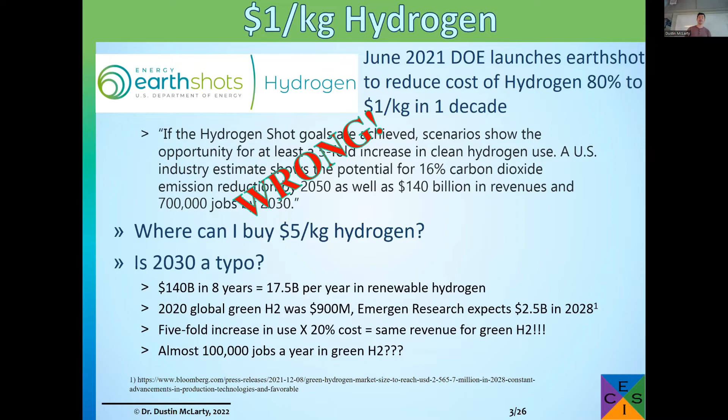I was really confused by this idea that we're going to see a 5-fold increase in hydrogen use while reducing the cost by a factor of 5. Wouldn't that mean we have the exact same revenue we have today? And I'm not sure if we're actually going to be able to hire 100,000 folks in this field every year, because I don't know where we're going to train 100,000 people in hydrogen every year.

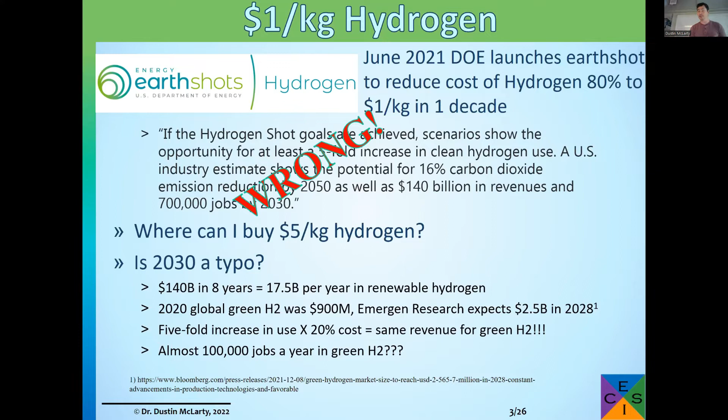But that is one of the goals of our center, to do that workforce development, especially here in the Northwest, where we are definitely leaders in this area. So some of the specifics of their statement were a bit of a stretch, but the overarching goal of $1 per kilogram green hydrogen, there's a lot to that. So let's see if that's even reasonable or feasible.

Well, for clean energy, everyone normally looks at California for leadership. If we start with a typical PEM electrolyzer you can buy off the market today, the most efficient ones advertise a nameplate efficiency of 55 kilowatt hours of electricity per kilogram of hydrogen produced. If we look at California's average retail electricity price, just the feedstock energy input is over $7 a kilogram. Okay, well, California is going to be a stretch to reach this goal.

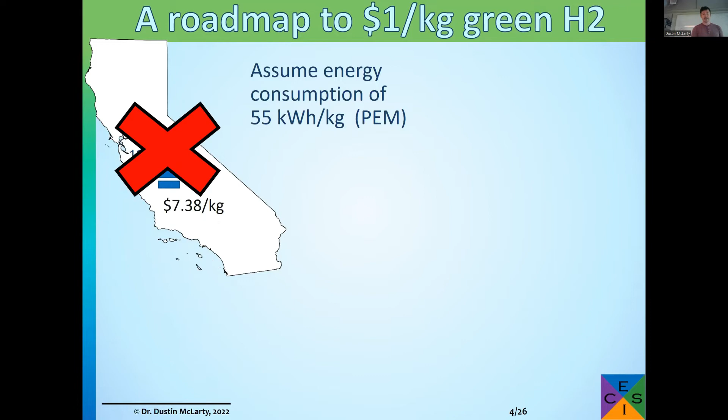Let's look at business-friendly Texas, where because of their deregulated energy market, you can subscribe to a 100% solar electric rate, with a 5-year locked-in fixed price, at 12.5 cents per kilowatt hour delivered to your house. Well, that's still almost $7 of energy cost per kilogram of hydrogen. So that's going to be a tough sell.

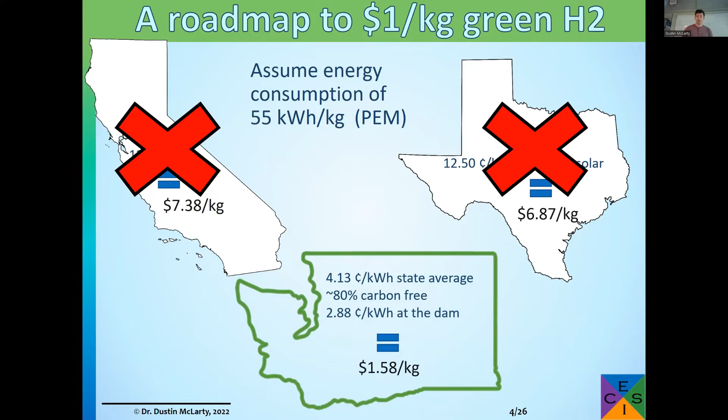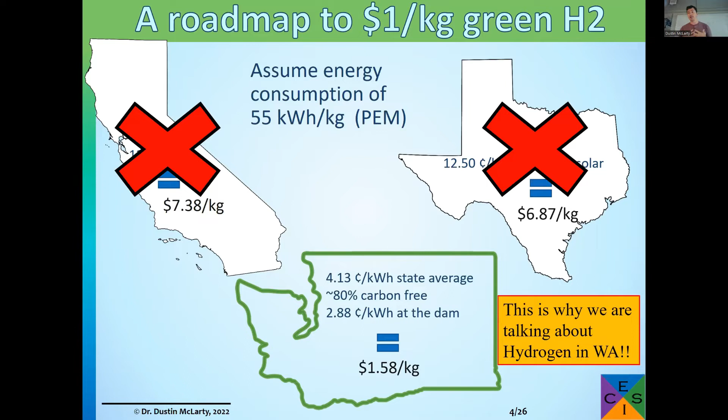Well, let's look at where we are here in the Northwest, where we have the cleanest, greenest energy in the nation, and it's cheap too. Our state energy mix is 80% carbon-free and costs on average 4 cents for industrial consumers. If you put your Bitcoin mining rig right at the dam today, you'll pay around just under 3 cents, which works out to a remarkable $1.58 per kilogram of input. So we're getting closer, and we have a huge advantage over Texas and California. This is why Washington is really talking about being a leader in this area of electrofuels and hydrogen.

But it's still not $1. So we have to do something more to get to $1. Let's look at the cheapest energy in the world, and we've got to cut out the middleman. We have to cut out the grid, because the grid's going to charge you 2 or 3 cents just to get it from the farm to your facility.

So looking just at solar farms, the average of the 25 largest solar farm PPAs built last year was $27 a megawatt hour. That's pretty good. The cheapest ever built, claimed, is a very large solar park in Abu Dhabi that came in at $13 a megawatt hour. They didn't have to pay or lease the land at all, so that's really just the facility and infrastructure cost. And they have great solar potential there.

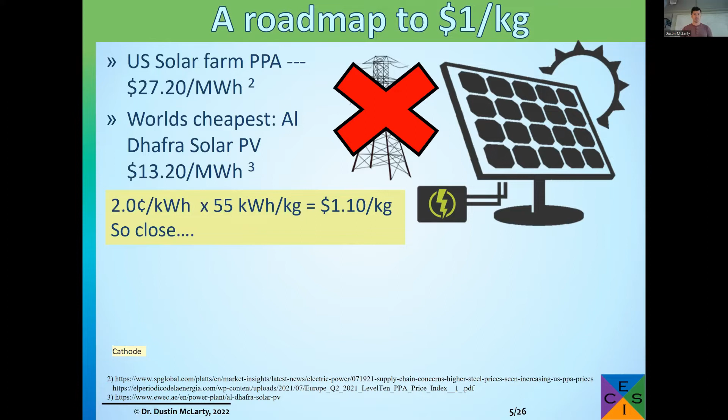So it's going to be hard to get to $13 here in the Northwest, but let's imagine we can get to 20, which works out to 2 cents a kilowatt hour. Using existing PEM electrolyzer technology, you're just over $1 on your feedstock cost. Pretty close. But if we want to go a little farther, we could talk about solid oxide electrolyzers. These have the potential to be down around 40 kilowatt hours per kilogram, a much more efficient use of electricity. So now we're at 80 cents of input cost, your variable cost, and that leaves a bit of margin for your upfront capital costs.

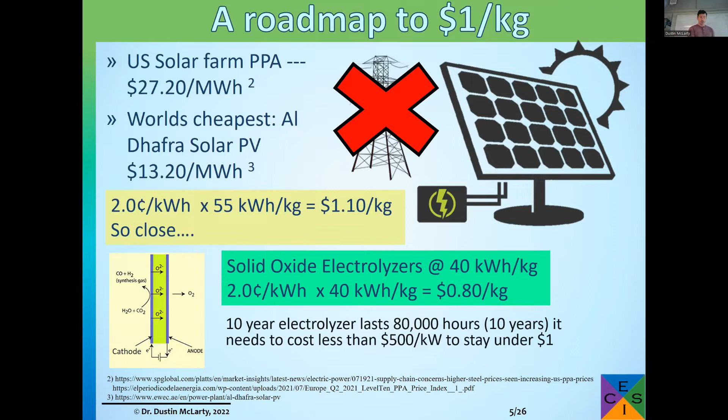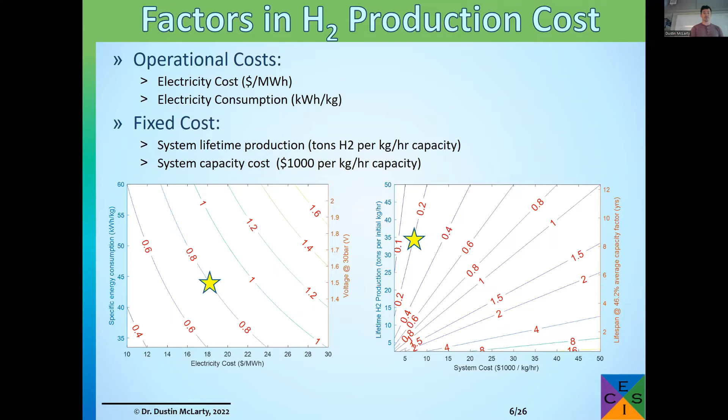So imagine we are successful in producing $1 per kilogram hydrogen. What are we going to do with it? Well, a lot of talk, especially in our region, is about injecting it into the pipeline, decarbonizing that natural gas system. Realistically, upper limits are about 20%. They're targeting maybe a 10% regulatory maximum initially, but let's average that and say we could get up to about 15% of the volume in our natural gas system as hydrogen. Unfortunately, that only works out to about 7% of the energy content, since hydrogen is a rather non-dense gas.

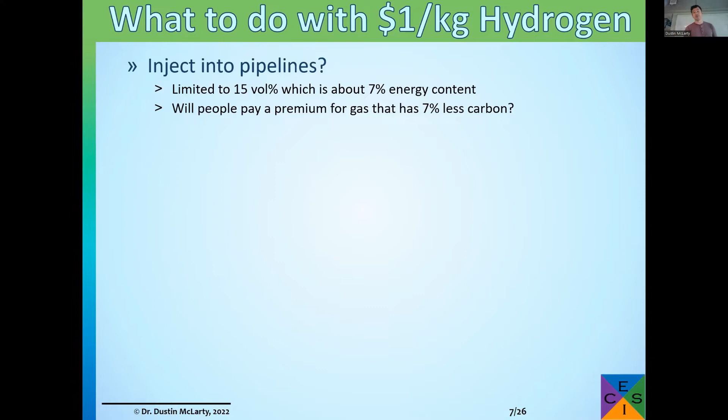Will people actually pay a premium for a fuel that's 7% less carbon? Not particularly, so you're only going to be paid pennies for this fuel content. It's not a really valuable use of hydrogen, and while displacing 7% of our natural gas would be a huge carbon reduction net, it's not likely the first place hydrogen is going.

What's done today, mostly moving it around California, is we liquefy it. It costs somewhere between $5 and $8 extra for the cryogenic capital equipment, the trucks, and the distribution system. So for every kilogram we're adding $5 to $8 cost, which is why it's $15 per kilogram at the pump in California - $7 of fuel cost, $8 to get it to the pump. So that's going to be difficult.

We could compress it and truck it - it's a lot more efficient to compress, and the trucks are a little cheaper, but we can only carry about 900 kilograms on the most advanced tube trailers. So even if we achieve $1 per kilogram, you're using an entire semi-truck to move $900 of goods. I put $900 of goods in my trunk every time I go to the supermarket these days. It's just not a viable means of getting hydrogen moved around.

We could build a dedicated pipeline network, and that's part of most proposals for this hydrogen hub, the Northwest Hydrogen Hub - a dedicated hydrogen distribution system that works for big industrial consumers and specific applications. But it's not going to address transportation everywhere or residential energy consumption in any way.

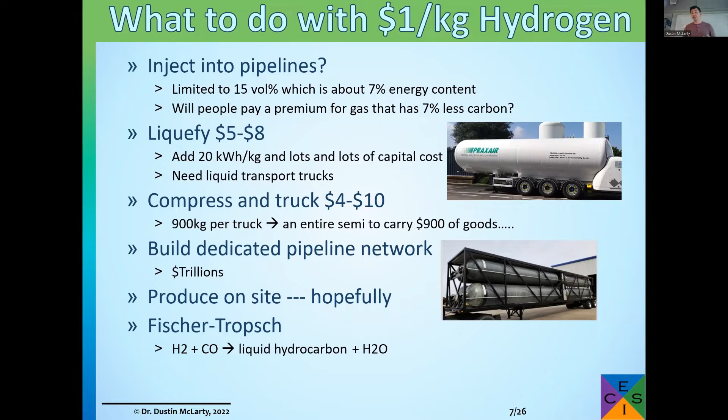So this is something I want to dive into further. If you're going to take hydrogen and make it into a liquid fuel or natural gas, we need to attach some carbon - we want to make it carbon neutral, so you've got to get green carbon somewhere. There are definitely places where carbon capture is happening at fossil fuel plants, but we need a universal solution, and we want to shut down all those plants anyway.

So we need a solution like direct air capture. The largest examples today are approaching $100 per ton of CO2 captured. The DOE has set another one of their Earthshots targeting $60 per ton, which works out to 53 cents per gallon of gasoline equivalent.

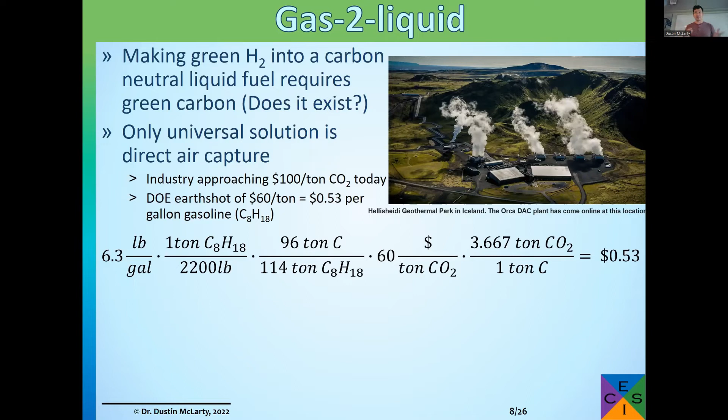So if you're starting from $1 per kilogram, and a kilogram of hydrogen is roughly the energy content of a gallon of gasoline, and we're adding 53 cents of carbon to it - would you rather be in the business of selling $1 per kilogram green hydrogen, or $1.50 per gallon green gasoline, or even $2 or $2.50 green gasoline? You'd make a lot more money that way and have a much bigger impact in reducing carbon.

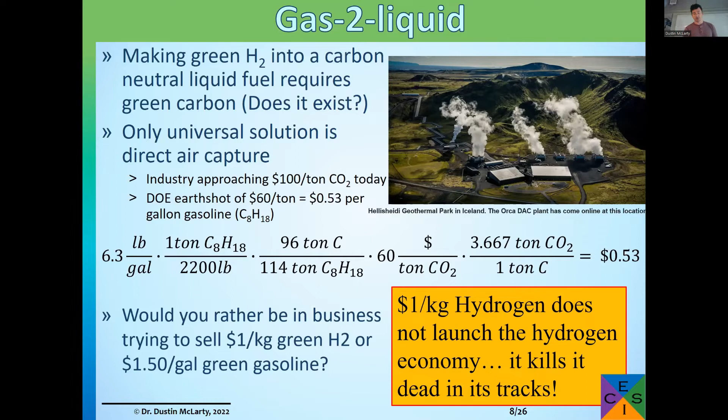So I'm fully supportive of DOE's target to get to $1 per kilogram hydrogen, but I don't believe achieving that will launch a hydrogen revolution in terms of transitioning everything to hydrogen. I think it'll actually open the door to electrofuels in general - non-fossil fuels that are direct, carbon-neutral replacements for our fossil fuels. That's where I want to focus my efforts, and where we're trying to propose a center that would focus on this as well.

So with that background on where I think electrolysis is going, I want to focus on pressurized electrolysis and talk about some of the benefits and challenges with that.

The clear benefits are, if you can do your electrolysis at pressure, you can pressurize the liquid water and then produce your gas, rather than producing gas at atmospheric pressure and having to use a hydrogen or gaseous compressor that's expensive, unreliable, and inefficient. When you go to quite high pressure, you can actually get better thermal energy recovery just because of the thermodynamic properties of the fluids we're dealing with, and I'll show that in a moment. You can also get better integration with the thermal chemistry.

So if you want to do methanation or ammonia synthesis, these things need to be done at high pressure. So if you can produce your hydrogen at pressure and go right into the reactor that's doing this thermal chemistry, you can combine the thermal, make your electrolysis endothermic, and if you have an exothermic reaction, it can be paired with that.

Pressurized electrolysis is great for direct integration with different storage opportunities, right into pipelines or your end use. Imagine a filling station that looks just like an electric supercharger, where the hydrogen is made on demand at the pressure as it goes into the tank. That's going to be more effective than trucking hydrogen around and having liquid hydrogen storage that needs to be boiled off and recompressed in a very complicated fueling station.

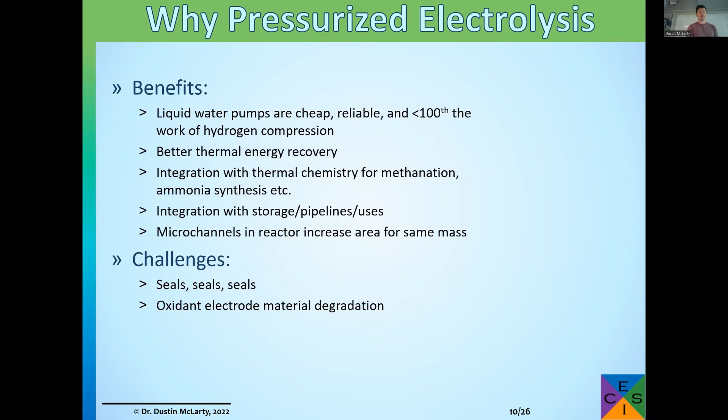Now, low temperature electrolyzers, PEM alkaline, they've demonstrated pressurized operation. They're pretty reliable. You can buy systems today operating at 30 bar, 200 bar. And so I'm going to compare a little bit to that as the baseline of how we could achieve 30 atmospheres of pressurization with high temperature electrolysis.

Now I'm going to present some results of an analysis that a student worked on, focused on this generic system. I'll detail it a little bit here. The premise is you have one liquid water pump that's doing all of the pressurization. It goes into this heat recovery system where it's recovering as much exhaust heat as possible. And you have two potential places for supplemental heat addition, which could be electric heating or heat recovery from another process.

And then I really want to start by highlighting this idea of an ejector here right before you go into your electrolysis stack. The ejector is allowing you to recirculate some of your high temperature gases, your steam and hydrogen, back through the system, because most of the material sets on the steam side don't want 100% humidity. They want some amount of hydrogen in there to sustain the electrode.

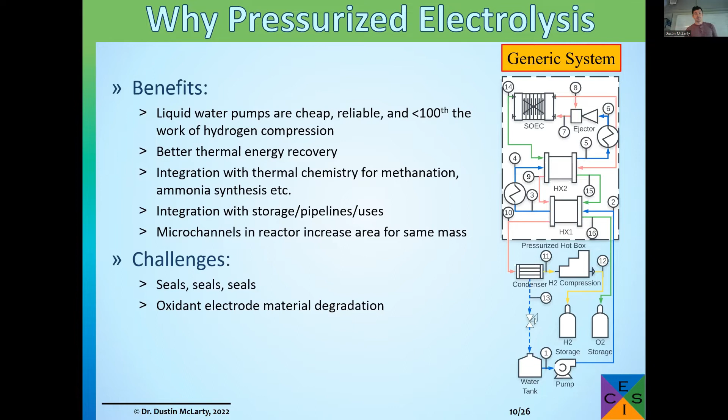Now, looking at the ejector, if your background is fuel cells like me, you'd say, well, that's going to be a bad system. The ejectors make things worse. And this is really true in fuel cells. Rolls-Royce had a great design. They really worked on these ejectors. I had some collaboration with them when I was at UC Irvine.

And the best you can really do when you use ejectors for recirculation rather than a blower, you're going to pay a penalty for that. And you're going to pay about 10 to 20% of the cell output, because you had to pre-compress all of this hot air going into the system above the operating pressure to really drive that recirculation with the ejector.

This is not going to be an issue with electrolyzers, because you're able to do liquid pumping, which is far more efficient at getting to pressure than gaseous compression. It just takes that much less work. And you also end up with a very favorable density ratio between your motive fluid, which in this case is steam, and the entrained fluid, a mixture of steam and hydrogen, which is lower density. So you get this very favorable density ratio, which improves the efficiency of an ejector, and the fact that you're not compressing a gas to provide the motive pumping power.

So even in the worst case scenarios, the ejectors in a high pressure electrolyzer will still account for well under 1% of the total electric input to the electrolyzer. So it's a nearly negligible impact having that ejector, which is nice, because now we have a solid state part that will never break and can handle the high temperatures very easily.

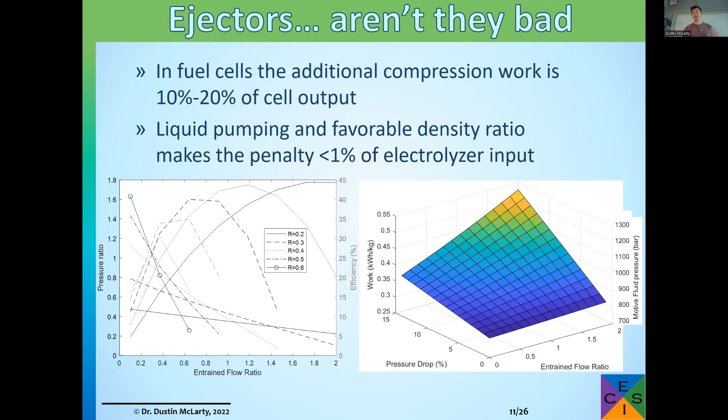So let's talk about the exhaust heat recovery. From a systems perspective, this is really what drives the overall efficiency of the electrolyzer system. Yes, we have the electrochemistry happening, that's key, but from a systems perspective we really need to capture as much of that exhaust energy as possible.

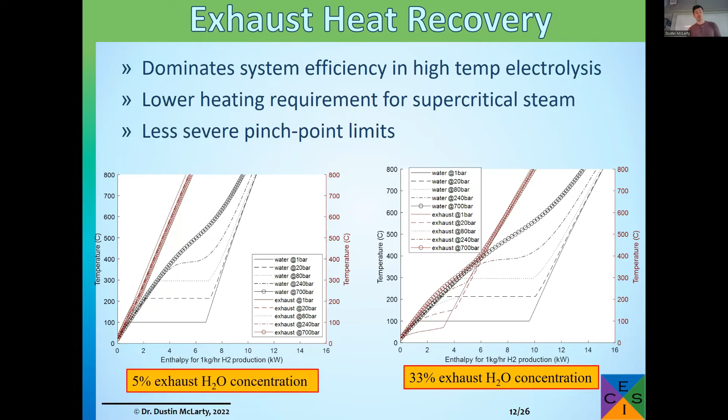So when we do the system design, we really have to focus on this pinch point analysis to make sure it's a feasible amount of heat recovery. Again, going to a high pressure system reduces those pinch point limitations. These were 5% exhaust humidity and 33% exhaust humidity on those two charts.

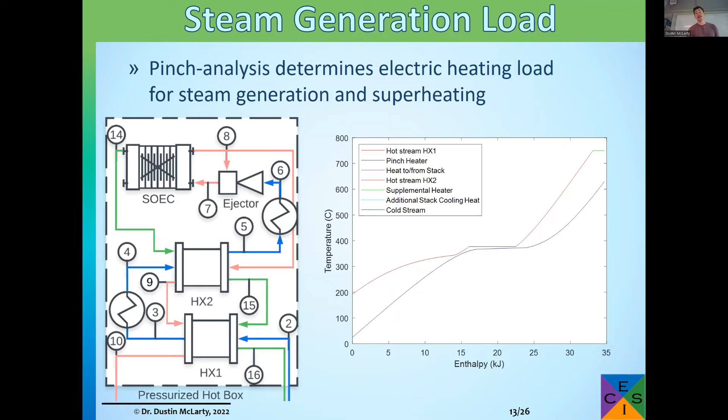So you can see we've identified how much heat we need to put into the pinch heater and how much supplemental heat up here at the top end we would need. We can do this analysis for all sorts of operating conditions and really start to understand how we should run a high pressure, high temperature electrolyzer.

That brings me a little bit to the electrolysis itself and the thermodynamics happening in the water splitting reaction when we go to pressure. We have some benefits, but actually a few drawbacks from a basic fundamental thermodynamics standpoint of going to pressure.

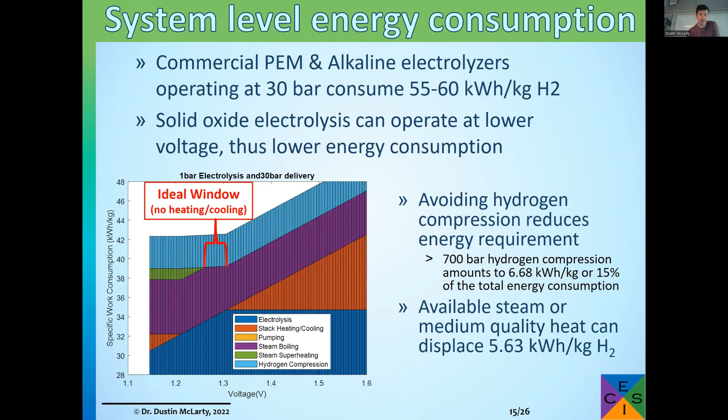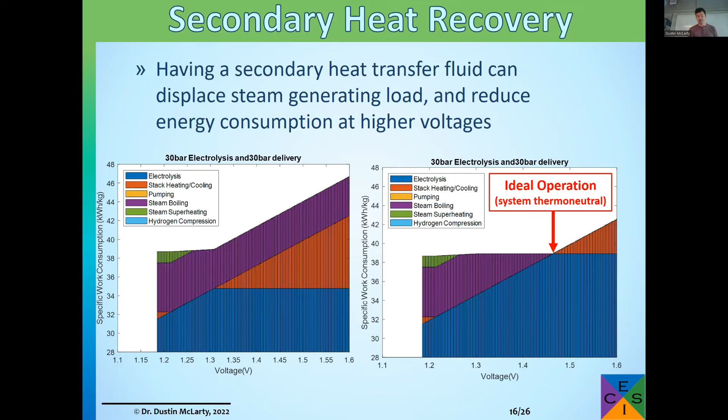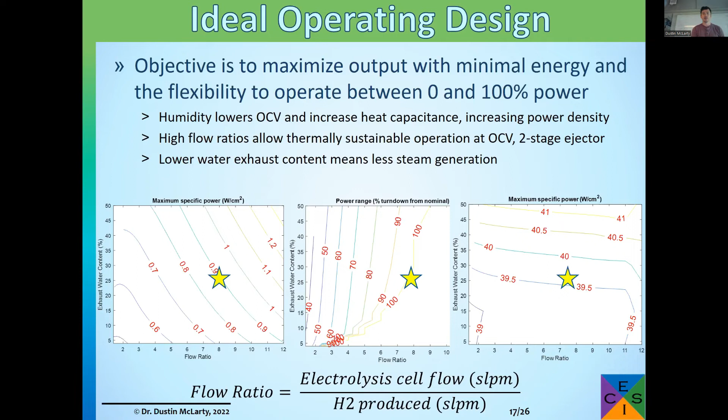Okay, so hopefully I've convinced you pressurized electrolysis is a viable and beneficial way to do electrolysis. I want to talk about how we're trying to do it at WSU with our VYZion material.

One of our innovations is a new ceramic manufacturing method where we're trying to print three-dimensional geometry with these zirconia-based powders and eliminate all the seals. As I said, seals—that's the challenge. But if we can use 3D printing to eliminate all those seals, that would be great.

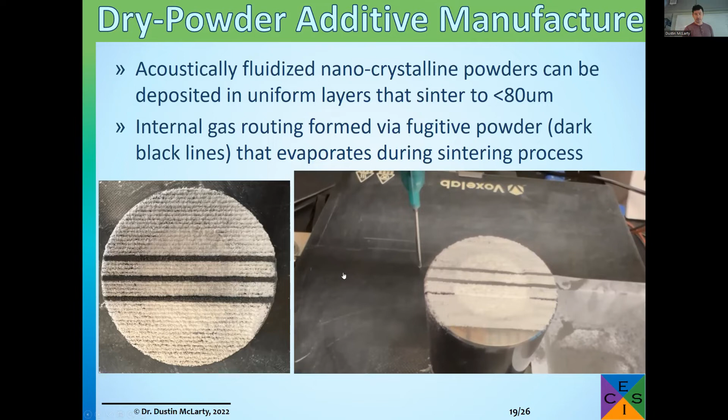So this was our first prototype. What this is showing is depositing a layer of fugitive material. The white powder there is YSZ, which is your typical electrolyte in a high temperature fuel cell. We can deposit interspersed into that fugitive material that will evaporate out of the assembly during the firing process. So we can leave behind these microchannels for gas routing, and do all different layers—print a layer, press it, print a layer, press it—additive manufacturing in that sense.

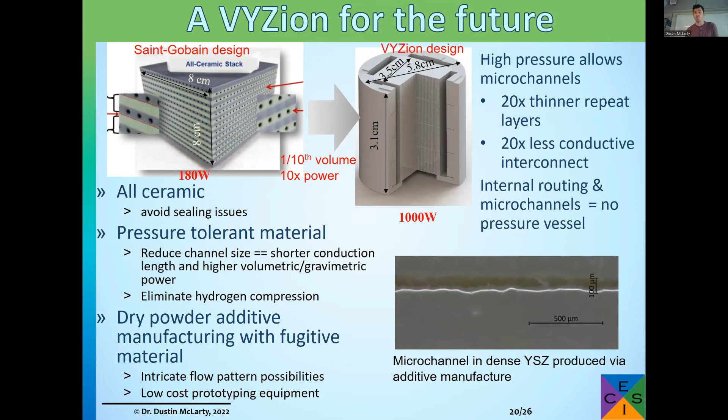To enable this, we needed all the materials to be very compatible so they would co-sinter. The general perovskites used as electrodes weren't viable at high pressure. So we found a way to take our normal electrolyte material, YSZ, and make it electrically conductive. With enough vanadium doping and some secondary dopants to boost it, we can get a very stable defect cubic structure identical to the electrolyte while having electrical conductivity.

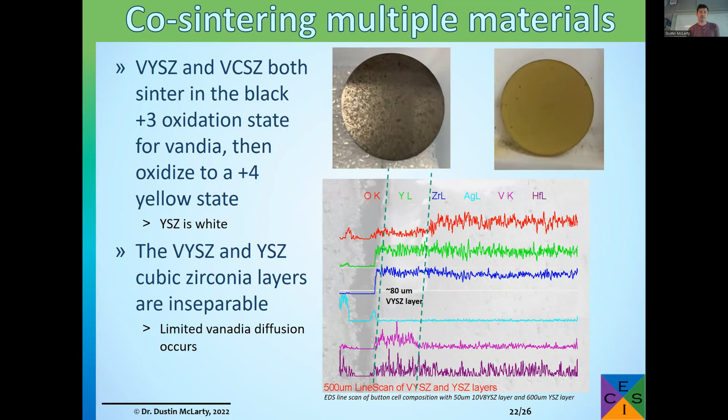We now have these components co-sintered, and you can't even tell in an image where the electrode ends and the electrolyte begins. A line scan shows the vanadium isn't diffusing into the electrolyte—there's a barrier layer, but this material will never delaminate at pressure. That's been a major milestone, showing we could make this material with the property we needed. It remains compatible with the electrolyte, and we can print it to make micro features inside—a huge milestone for where we're taking this research.

We've been testing in a 10 bar facility we developed years ago for testing commercial apparatuses up to 3 or 4 kilowatts—a large 12-inch internal diameter rig. But we wanted to explore much higher pressure, so over the past 6 months we built this first of its kind. We're not aware of anything like it in the world. It lets us test button cells and small stacks up to 2 inches diameter at up to 100 atmospheres.

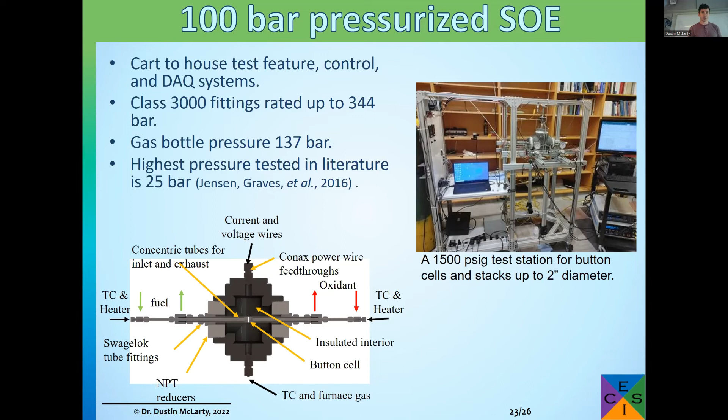The rig itself is rated for 3,000 psi, so we could eventually go to 200 atmospheres, but the gas bottles we're supplied are around 137 atmospheres, so we only get about a quarter of the bottle at 100 atmospheres. Eventually we'll push to even higher pressure. This has been an enormous challenge to build, but it's exciting because we're getting fantastic results the world has never seen before. If you're interested in collaborating on this, feel free to reach out.

The other main thing to highlight: we did a 2-week test, and during those 2 weeks it was still improving, still in that initial conditioning phase. So it's not a material that breaks down and degrades quickly—it's got some longevity to it. We don't know yet if it will last the 8 to 10 years we need, but it shows promise for durability.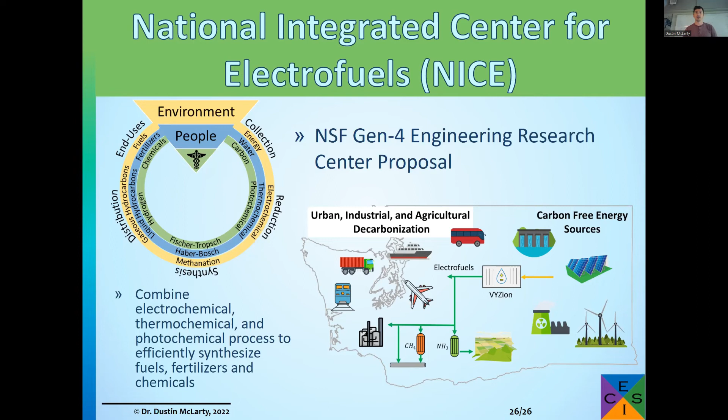So with that, I want to conclude with a little pitch. We're putting together a team of academics, four or five universities led by WSU, focused on this electrofuel future. Beginning with hydrogen as that initial bridging fuel and the niche applications where hydrogen makes perfect sense, then building to something that would displace all of our transport fuels, all of the industrial fuels, the fertilizer industrial ag ammonia, trying to get all of those fuels produced from clean, sustainable energy here in the state of Washington. It's a big push in conjunction with the Hydrogen Hub proposal from the Department of Commerce, and I think it has a lot of potential for Washington to remain a leader in electrofuels. Anyone that wants to participate and join, please send me a message and we'll find a way to get you incorporated in the center here. With that, I'd like to conclude. Thank you for your time, and I'll be happy to answer any questions.